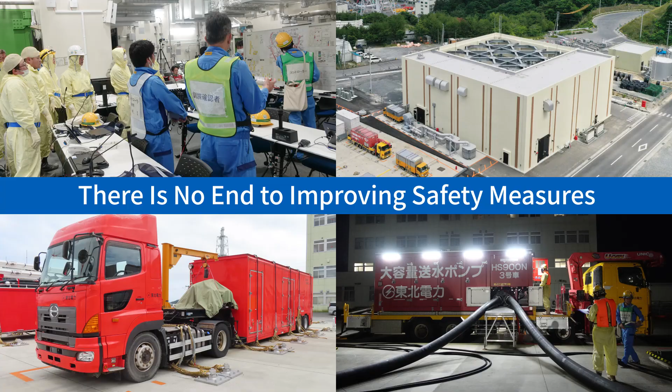Located in the middle of the Oshika Peninsula at the southern tip of the Sanriku coast on the eastern side of Miyagi Prefecture, the station spans Onagawa Town and Ishinomaki City in Miyagi Prefecture.

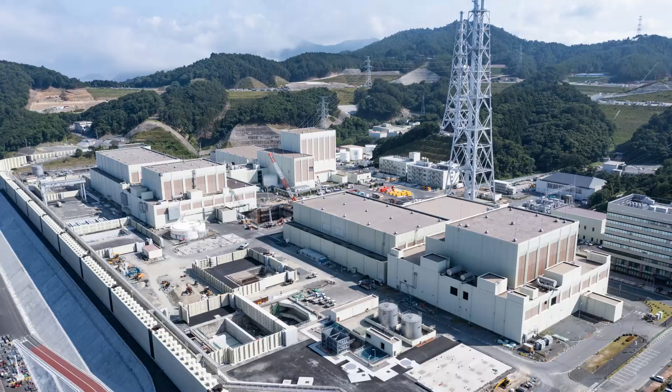Onagawa Nuclear Power Station has 3 units: Unit 1, Unit 2 and Unit 3. Unit 1 started operation in 1984 and is undergoing decommissioning. This process began in 2020 and is scheduled to continue until 2054.

Unit 2 started operation in 1995. In May 2024, safety upgrades aligned with new regulations set after the TEPCO Fukushima Daiichi nuclear power plant accident were completed. In November of the same year, Unit 2 resumed operation for the first time in approximately 14 years since the Great East Japan earthquake.

Unit 3, which began operations in 2002, is currently in a state of stable shutdown. Total electrical output of Unit 2 and Unit 3 is 1.65 gigawatts. This power station can supply electricity equivalent to about 70% of the total electrical demand quantity in Miyagi Prefecture.

The Great East Japan earthquake in March 2011 brought significant seismic and tsunami activity to the Onagawa Nuclear Power Station. Yet, despite these challenges, the plant systems for shutdown, cooling, and containment operated effectively as designed, ensuring that all reactors, Units 1 and 3, which were operational at the time, and Unit 2 in the reactor startup process, were safely shut down.

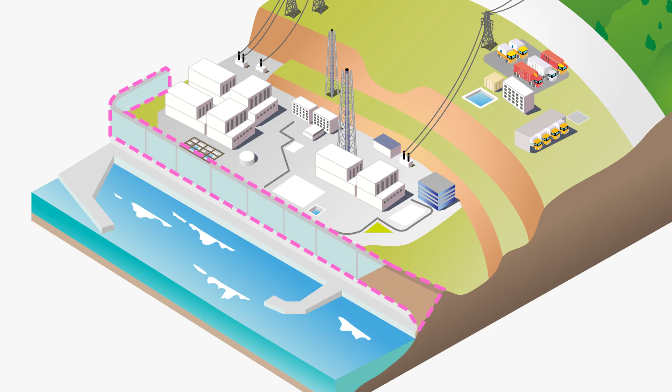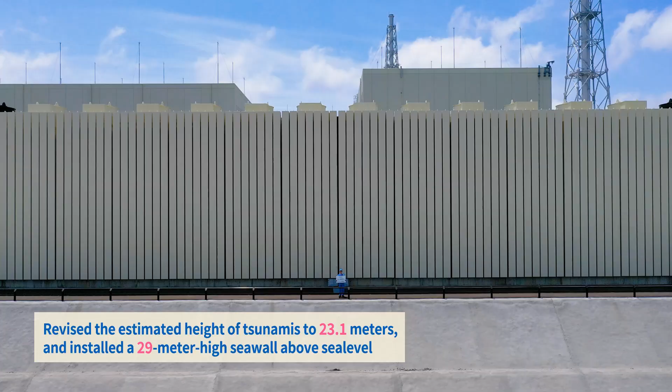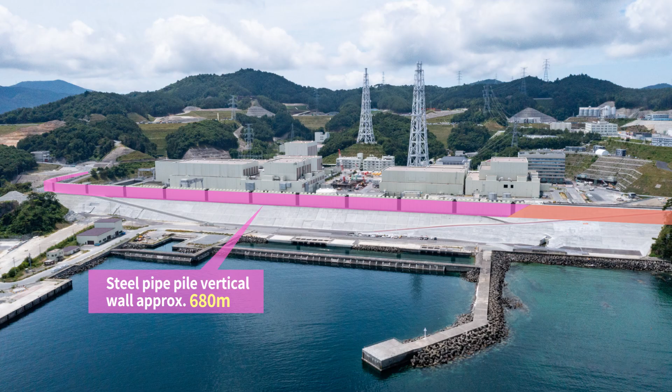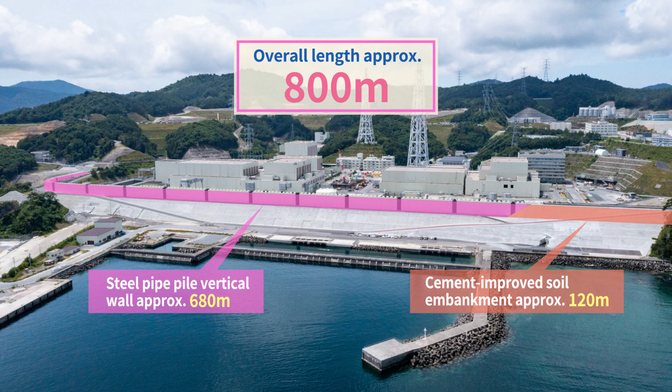To ensure the reactor can be safely shut down, preparation for both tsunamis and earthquakes is especially important. Number 1: Preparation for tsunamis. For tsunami preparedness, we reassessed the maximum potential tsunami height to 23.1 meters and built a 29-meter seawall to provide a robust safety margin. This seawall, approximately 800 meters in length, includes 680 meters of steel pipe-pile vertical wall and 120 meters of cement-improved soil embankment, protecting the plant from large tsunamis. We also added tide barriers around the intake channels to protect the site from seawater flooding.

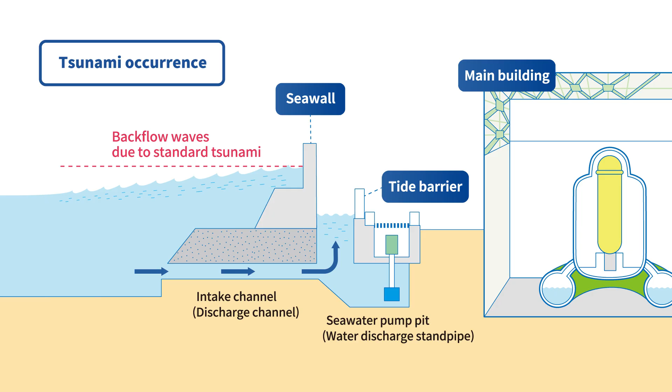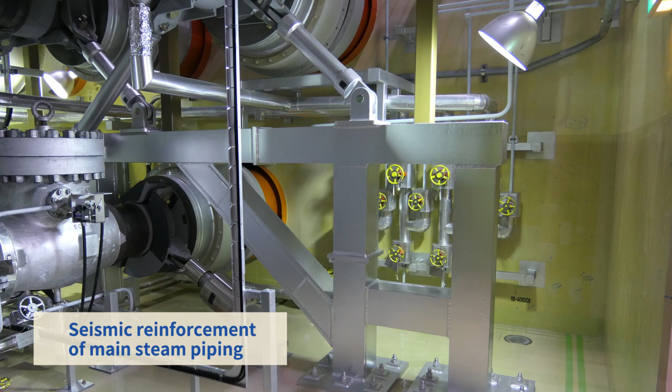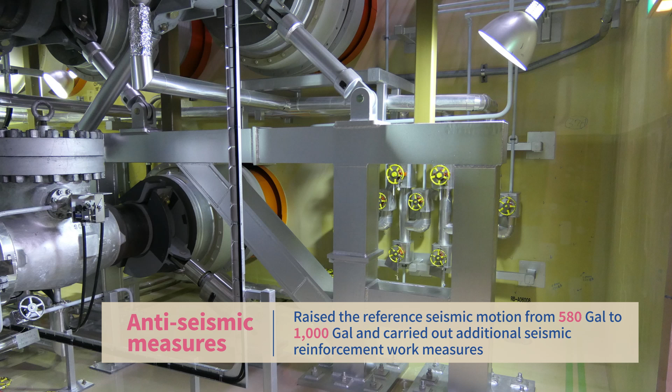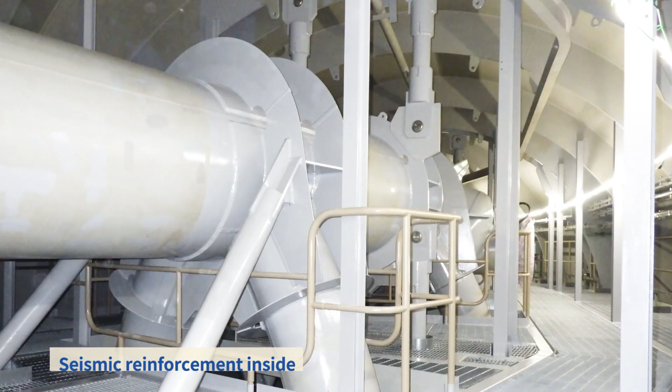Number 2: Preparation for earthquakes. As part of our earthquake preparedness, we raised the estimated seismic motion around the power plant from 580 gal to 1000 gal, further reinforcing the plant's seismic resistance. The gal is a unit that expresses the instantaneous force felt by people or buildings. Approximately 6,600 seismic reinforcements were implemented before the Great East Japan earthquake, and an additional 9,000 reinforcements were carried out after the earthquake.

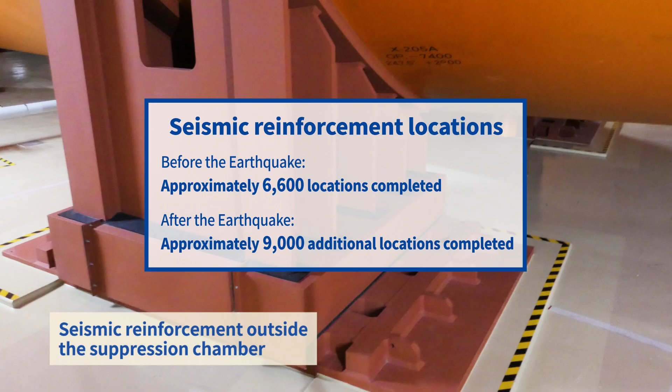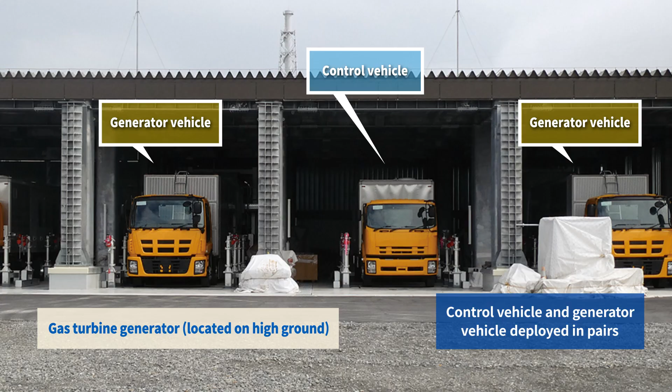Number 3: Preparation to ensure electricity and water. We have made significant improvements to ensure a stable supply of electricity and water for reactor cooling. A gas turbine power generator, which differs in mechanism from the existing emergency diesel generators, was installed on high ground as a provision for securing electricity. Electricity is generated by combining the generator vehicle and control vehicle. To minimize the impact of large earthquakes and tornadoes, the light fuel oil tanks are installed underground.

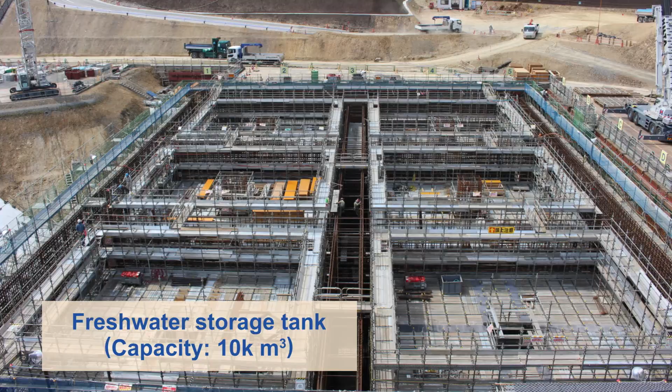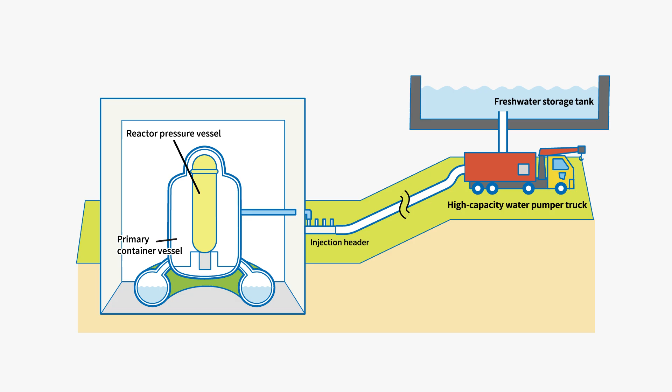A 10,000 cubic meter freshwater storage tank was installed on high ground to ensure a stable water supply. We have allocated high-capacity water pumper trucks capable of directly or indirectly injecting water into the reactor or spent fuel pool from the freshwater storage tank during severe accidents.

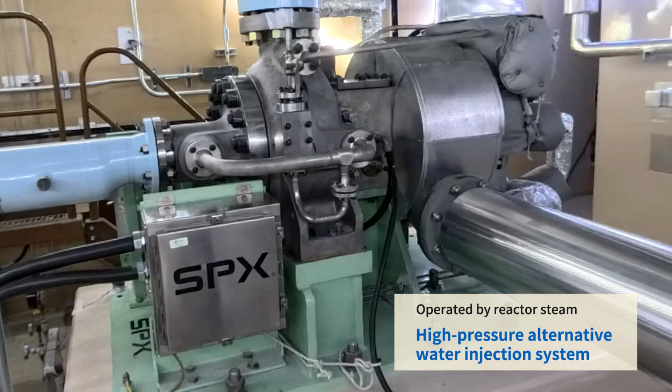Also, a heat exchanger unit vehicle is on standby to remove heat from the reactor. Should there be a total loss of power, we have installed a high-pressure alternative water injection system that operates on reactor steam without electricity, as well as a DC-driven pump if AC power is lost.

Number 4. Preparation for containment of radioactive materials. Safely containing radioactive materials in an emergency is crucial.

During the TEPCO Fukushima Daiichi nuclear power plant accident, damage to the primary containment vessel and reactor pressure vessel resulted in a hydrogen explosion that compromised the reactor building and allowed radioactive materials to escape.

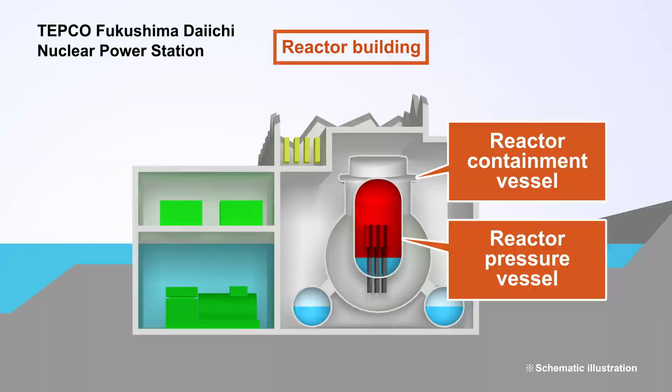We have taken measures to prevent such incidents. To manage potential hydrogen accumulation from any nuclear fuel breach, we have installed hydrogen recombination devices and filtered venting systems. To prevent primary containment vessel damage, we installed a filtered containment venting system that reduces the release of radioactive materials to less than 1/1000th when steam is vented into the atmosphere.

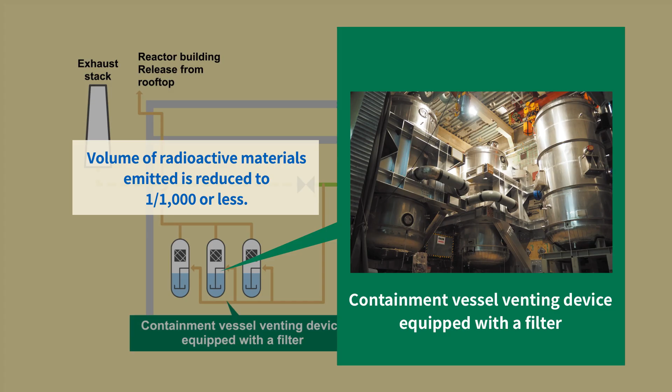Number 5. Preparation for various disasters and risks. Beyond tsunamis and earthquakes, we have taken precautions against various other risks.

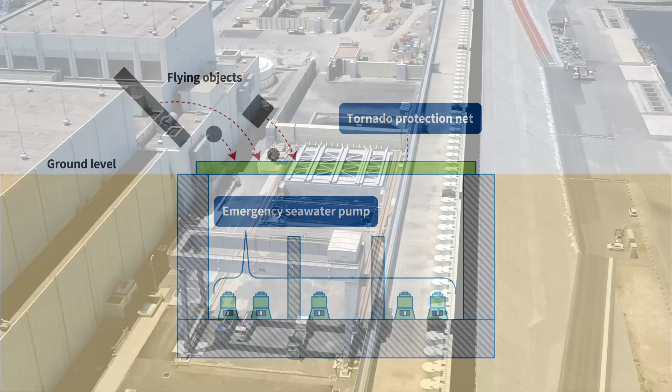Anticipating the potential for one of Japan's largest tornadoes with wind speeds of 100 meters per second, we have set up a tornado protection net over the seawater pump room to protect the emergency seawater pumps from damage caused by flying objects. Fire protection measures have also been taken to ensure that in the event of a fire, cables located in the same area as the fire source are not damaged.

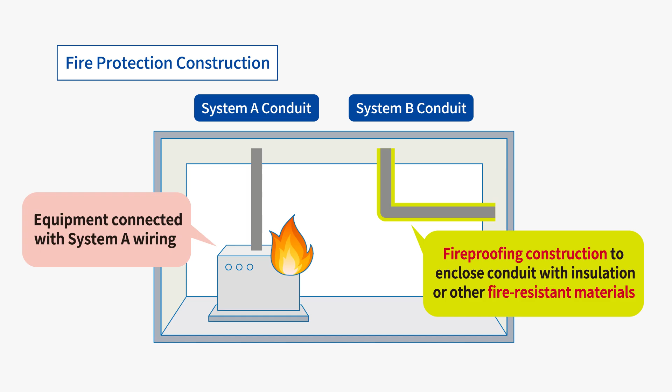We covered cable conduits with fire-resistant insulation, and seismic reinforcement were made where necessary to accommodate the added weight from these fire protection measures.

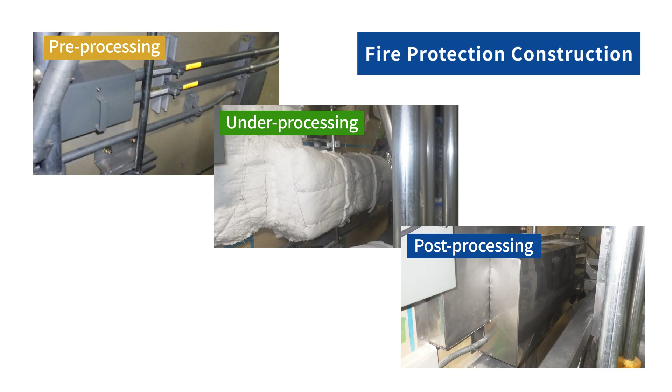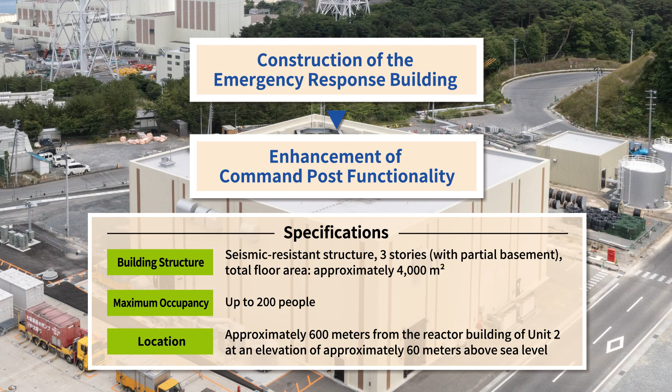To prepare for the risk of a large-scale nuclear accident, we have established a seismic-resistant emergency response building on high ground, acting as a local command post. This facility can house approximately 200 personnel and is equipped with communication facilities.

Additionally, we have facilities to ensure the plant's safety in the event of a terrorist attack.

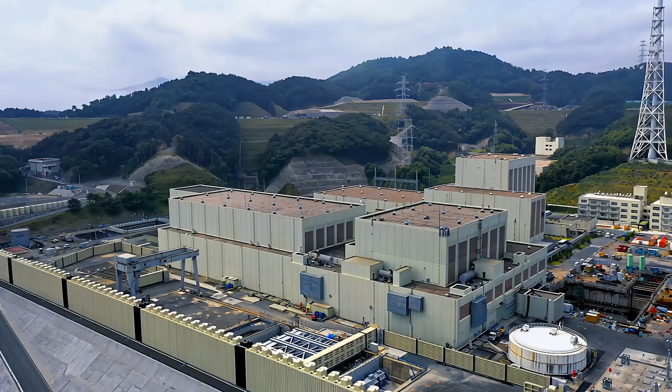Following the completion of safety upgrades, Unit 2 has been progressing through the steps required for restarting operations. In September 2024, fuel loading into the reactor was implemented, followed by reactor startup in October. After various inspections, power generation restarted in November 2024, marking the restart of Unit 2 of the Onagawa Nuclear Power Station for the first time in 13 years since the disaster.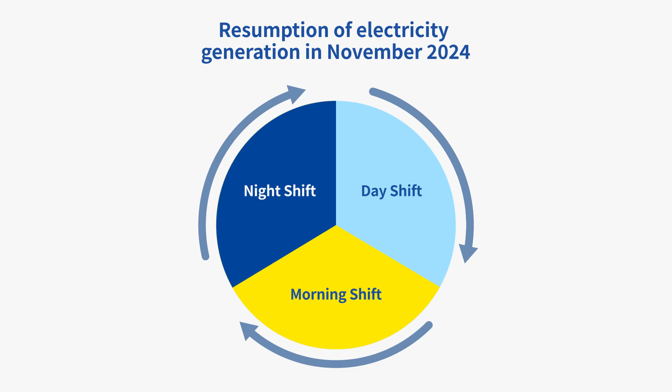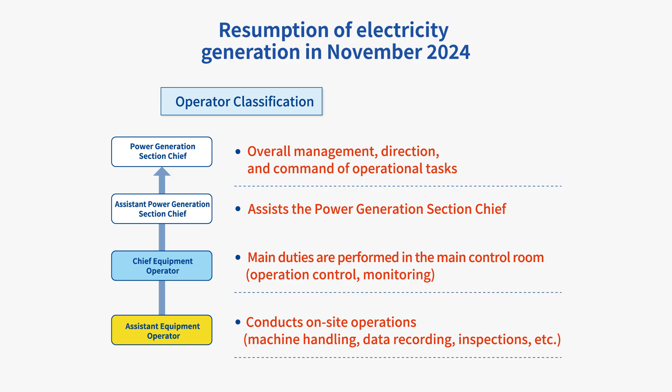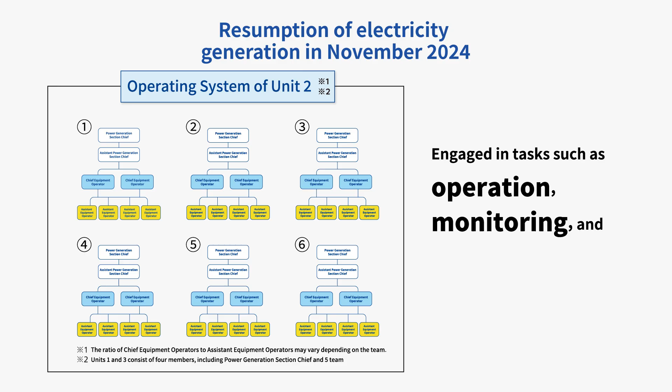The station operates 24 hours a day in a three-shift system, where employees, also known as operators, are responsible for the station's operation. A total of 8 operators, including and led by the Power Generation Section Chief, consist a team in Unit 2, responsible for tasks such as operation control, monitoring, equipment handling, and inspections.

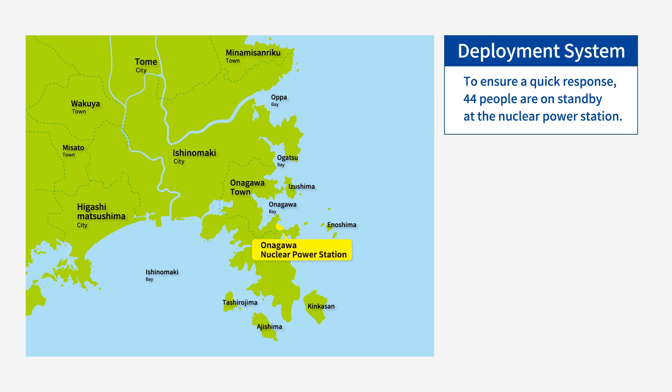To ensure a rapid response in case of emergencies, a permanent response system is in place. Additionally, on weekends and public holidays, staff are on standby within the designated area to ensure swift assembly in the event of an emergency.

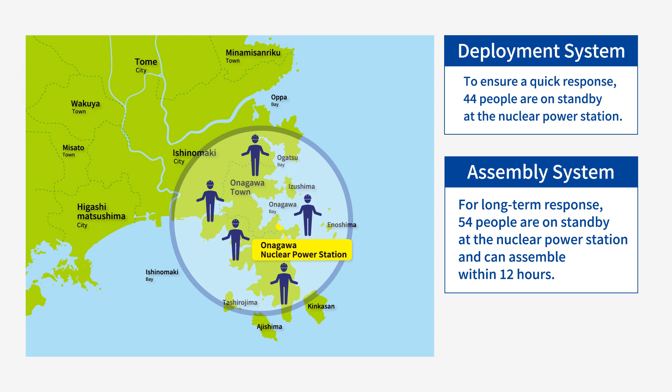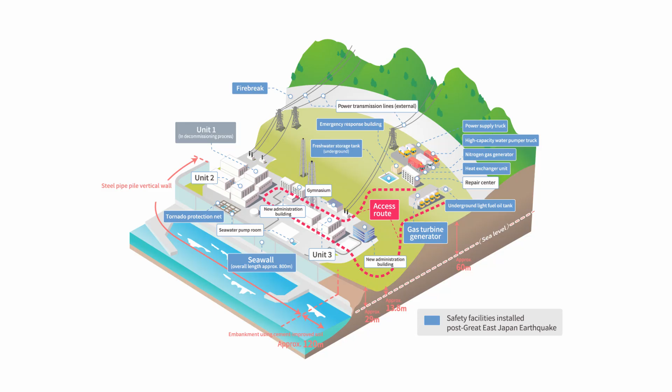In the event of a major incident, an emergency response headquarters led by the superintendent is ready to act. Teams are assigned specific functions to ensure a swift and effective response. While advanced safety equipment is critical, the real key to safety lies in the people who operate it.

To maintain and improve emergency response capabilities, we conduct regular training for a variety of scenarios.

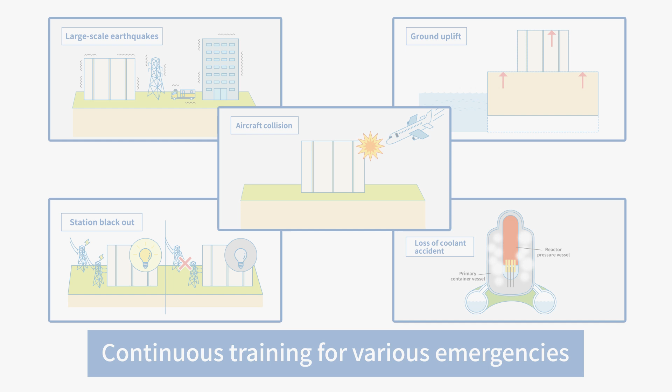Both now and into the future, by maintaining high standards of preparedness and continuous engagement with local residents, we aim to provide reliable power supply and contribute to regional prosperity while strengthening our relationships with the community.